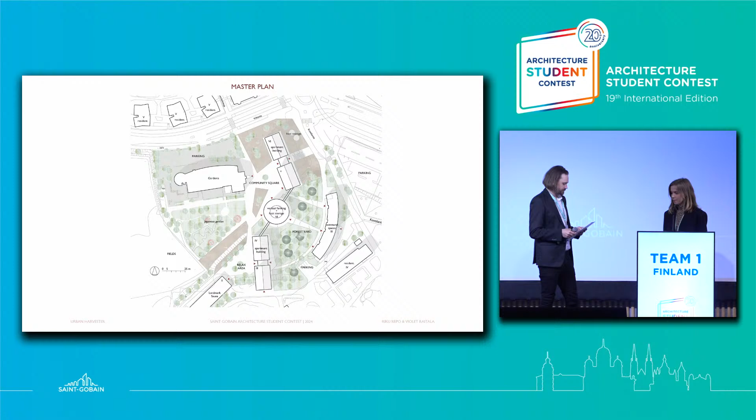The center of the site is a vertical farm building resembling a silo. In addition to giving residents an opportunity to harvest food, it functions as a seasonal thermal storage. With its positioning, it creates a center point to the surrounding buildings, and the connecting bridges provide easy connections and contribute to overall aesthetics.

Communal and commercial functions can be found throughout the area, making it easy to do everyday chores and to meet other people.

Now, let's continue with the renovation. The renovated building has been designed to meet the communal needs of the entire area. The building is divided into three functional zones for working, eating, and relaxing. The first and second floors are connected with a large opening which allows daylight to enter, and also enhances the interaction between the spaces. The building's exterior architecture has been preserved, maintaining its historical and aesthetic value.

Now let's move on to the new construction. The new construction combines elements from farm buildings and the high-tech architecture of Viikki. Red, different shades of grey, and glass appear traditionally in farm and cultivation buildings. Implementing these elements into the design, the complex makes a new distinguishable landmark for Viikki.

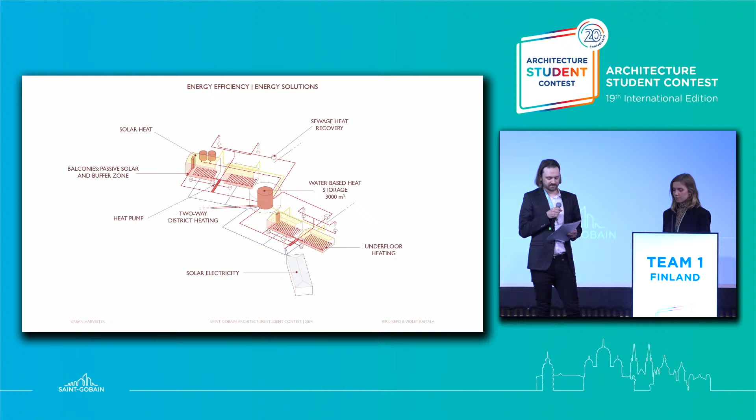Due to the cold climate of Finland, most of the energy in the buildings is used for heating. In Urban Harvester, the heat loss caused by high amount of glazing is compensated by utilizing active and passive solar energy. The energy is being harvested with a large amount of solar thermal collectors. The other energy solutions include a wide range of efficiency boosting technologies, and in the calculations, the building performed remarkably well.

Let's finish with the old museum. The museum is transformed into a commercial sauna. Due to the status of the museum building, the sauna is made with a space-within-a-space idea. The interior of the building is stripped to the frame and converted into a cold space. The exterior remains intact, and the building continues to stand as a landmark.

The whole project area aims to offer climate-wise living and self-sufficient solutions for everyone living and visiting the area. Together with long-lasting and carbon-wise building solutions, Urban Harvester strengthens the identity of Viikki as a creative, innovative, forward-looking part of the city. Thank you.

Photo. There's our certificate.

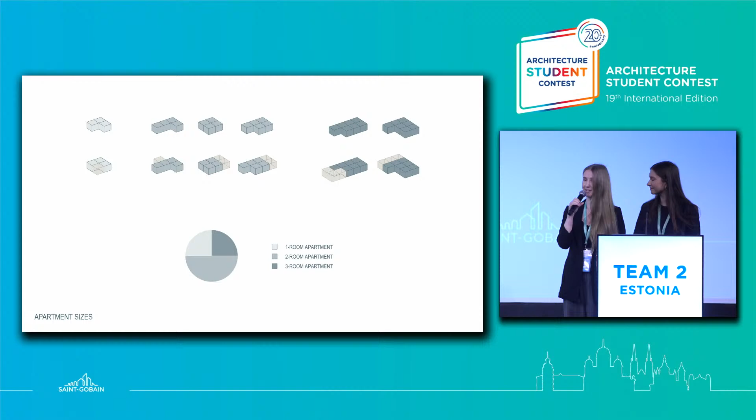We created a module system where one size fits all functions, allowing variability and simple structure. 13 square meters proved to be a carefully optimized module size. Connecting the modules creates different sized apartments. The main pedestrian street creates good connections and is a part of public space.

Commercial properties are located in the northern quarter to create a good connection between the campus and Gardenia. Commercial properties include restaurants, cafe, gym, and daycare.

In between, we integrated playgrounds and gathering areas. We wanted to create a diverse outdoor living environment, so throughout the plot there's a learning path, including the existing Japanese garden. The learning path ends with an open-air museum where nature-inspired exhibitions and workshops are held.

New buildings are divided into 2 types, A and B. Module quantity dictates the size of the apartments from small to extra large. Our system leaves a possibility for open or closed room composition. As the building rises, it steps back, allowing sunlight access and creating room for balconies.

Our building minimizes the use of concrete and instead, the main construction is made from local sawn timber. Roof construction carries the weight of the solar panels to maximize the use of renewable energy. All the exposed frames are made from glue-laminated timber, which is more durable to moisture. To extend its lifetime, all the horizontal areas are covered by steel plates.

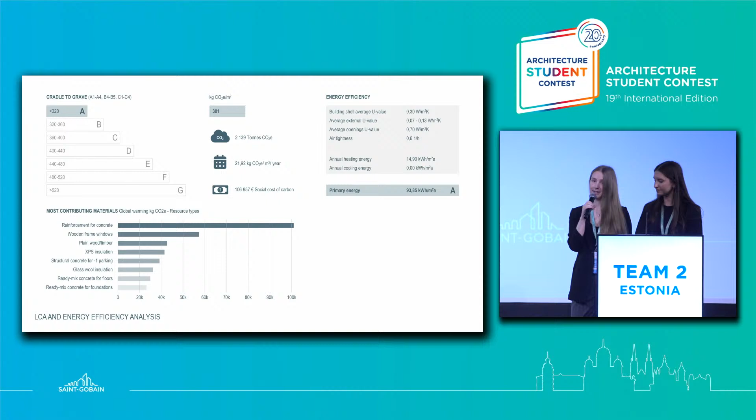The underground parking structure carries the weight of the building. We achieved the best results regarding the LCA and energy efficiency analysis. One building produces 301 kilograms of CO2 equivalent per square meter.

Our reconstructed building's original volume is long, narrow, and arched. Changing its function to dwellings, we wanted to avoid long, narrow hallways. Therefore, we added 3 new extensions, creating spacious, luminous stairwells.

Towards the inner quarter, we added balconies integrating the module system to create a cohesive design between the reconstructed and new. The reconstructed building includes a spa and sauna complex on the ground floor and apartments on the upper floors. A look throughout the spacious atrium in the building.

Our project creates a quality and cohesive environment for all age groups using sustainable approaches. Thank you.

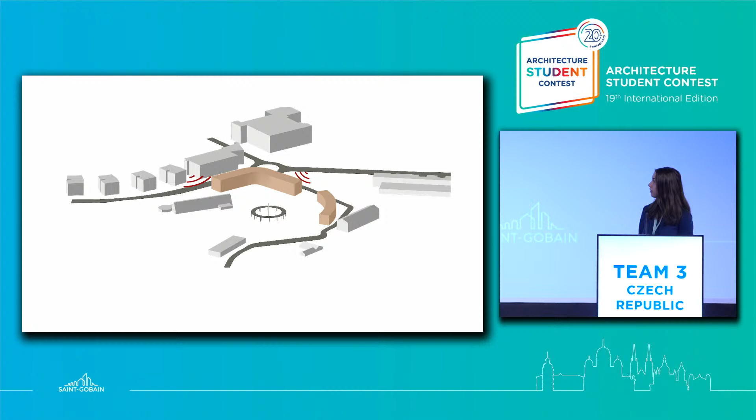The main building is built as a sound barrier between the main road and the public space. I used solar analysis where I found that between 11 a.m. and 6 p.m., the vertical element in the middle casts shadows on some parts of the buildings, and in these parts I created vertical glazed courts.

Based on the surroundings, I created a rectangular shape of the building. This building should be high enough to provide a nice view of its surroundings, so I created green roofs covered by steel shelters and roofs.

The first floor of the building is especially for commercial use and individual entrances. The rest of the floors have rooms for long-term accommodation for students and young families, with common spaces such as main corridors, laundry rooms, shared kitchens, and the last 3 floors have vegetated roofs.

As several buildings in that area are being demolished, I will use that construction rubble as an admixture to the concrete, which will be used in the underground floor and the first floor. The rest of the floors will be from CLT panels with a low carbon footprint, which can be easily prefabricated, and the rest of the building is with balconies and steel roofs.

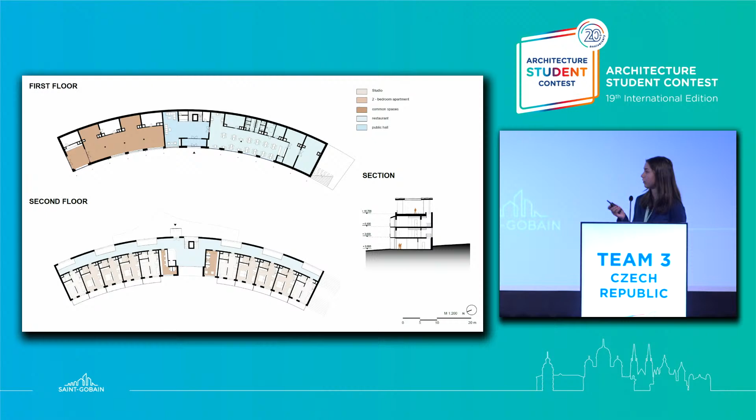The current office building has been changed into short-term accommodation for teachers and visitors of the university. As in the first building, the first floor is considered for commercial use, and the rest of the floors are mainly for rooms. The load-bearing structure of the building is from concrete or reinforced concrete, and the facade will consist of concrete panels on the first floor and white plaster in higher levels.

The energy and power concept of the building consists of controlled ventilation with use of solar energy, drawing energy from the ground by water heat pump, and the project uses a rainwater harvesting system. Both buildings have been assessed for daylighting and overheating, and dividing walls and ceilings were designed to meet specific thermal, acoustic and fire requirements by using appropriate Saint-Gobain materials and systems.

And finally, I would like to show you the transformation of the Big Museum. Thank you.

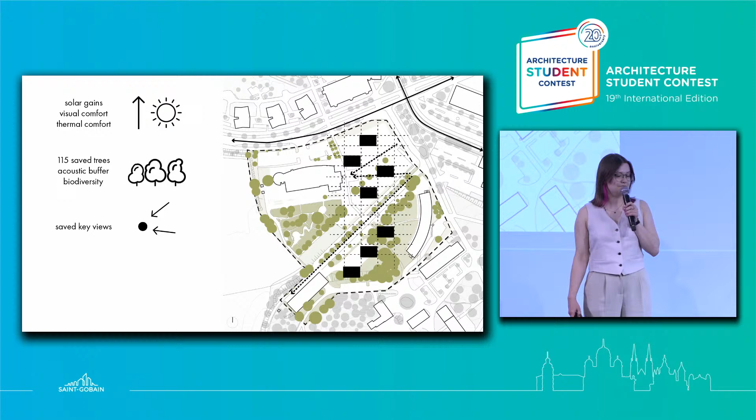The love and respect towards nature shapes the identity of the Finnish community. Our architecture is also open to the landscape. We designed a modular form that follows natural conditions, such as the sun path, existing greenery, and key views. We saved all 115 existing trees and added new ones.

The form enables maximized access to daylight, which is crucial in Finnish conditions. It also increases visual comfort, and trees provide an acoustic buffer while reducing carbon dioxide emissions.

The outdoor space is connected by the sport and recreational path, which leads us to the old museum. It was repurposed into a multifunctional court within the existing walls. The whole area is complemented by craft and local services managed by the residents.

Sauna is a space that integrates Finns. As you can see, you can turn anything into a sauna.

In the center, we've created an auditorium connected to the water zone and sauna. In summer, the water cools the area, and in winter, it can be used as an ice rink. Because, as the saying goes, there is no such thing as bad weather.

Only bad clothing. Our research proved how fast inhabitants' needs change and how fast architecture must respond to those changes. Following the open building approach, we designed a core house, which is a 2 or 3 bedroom module connected by

the core, a bioclimatic community greenhouse. We predicted possible adaptation scenarios: separated kitchen, additional workspace, or making the module more accessible. In the future, the building can readapt into co-living.

Building A underwent adaptive reuse, fully utilizing the existing circulation cores. We added vertical and horizontal extensions, making the building most efficient.

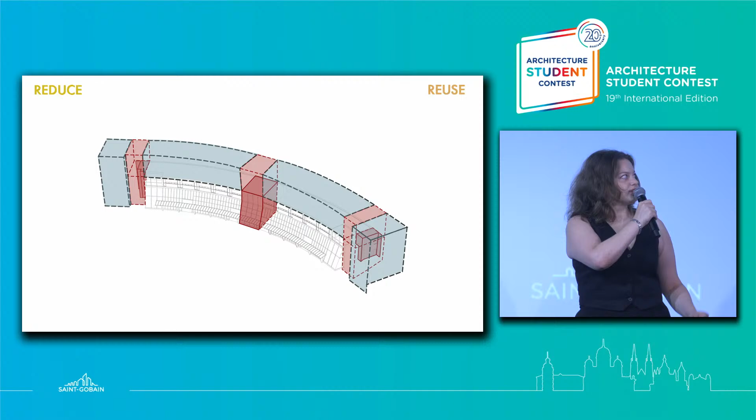On the ground floor, we proposed a Fab Lab to continue the university tissue. It's an innovative space where you can exchange knowledge by physical experience and integration.

Above, we proposed dwellings for researchers while maintaining the existing layout. In the site extension modules, we proposed integration areas, and above, co-living studio dwellings.

Wooden construction was always present throughout Finnish history. And look how easily it's built. That's why all the new structures are designed using prefabricated CLT construction,

locally sourced materials, along with recycled ones, significantly reduce the carbon footprint. Our habitat is a place where the old and the new coexist in harmony.

So now it's time for reduce. Both new and existing structures have well-insulated building envelopes. We doubled the external walls to create traditional casement windows.

Blinds allow for healthy sleeping conditions during the white nights. And noise is reduced thanks to false ceilings and floating floors. And it's time for reuse, which means the use of heat recovery and water recycle system.

Produce means using renewables, geothermal heat pump and photovoltaics. It all led to creating passive buildings. In the future, our building can integrate with the wider grid and redistribute the surplus of energy.

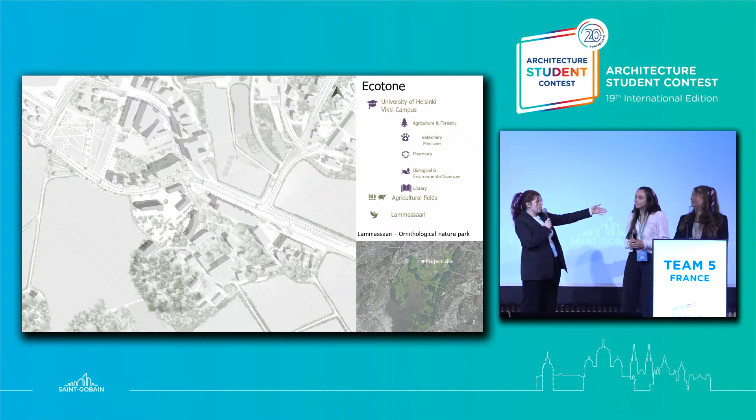This is what we sought to explore in our project proposal with a site that allows it in every way. It's the interaction between the university and the Lammassaari ornithological parks and the resulting exchange that form the basis of our research. Indeed, this urban setting is highly conducive to the creation of an ecotone, a transitional zone between two ecosystems where environmental conditions are distinct.

It's for this reason that we introduce a new main axis in our project, directly linking the university to Lammassaari, that we aim to dynamize throughout the journey whilst incorporating terrace spaces and a network of secondary paths. Then, a new botanical composition with a high layer for trees, a medium for shrubs, and a low for flowers.

It's with this framework that our building takes shape and will subsequently be green up to the rooftops, aiming to create interaction between the inhabitants of the district and the fauna while preserving a maximum of what's on site, the least possible disruption of the existing trees or the site's topography.

First, Building A, a multifunctional rehabilitation benefiting university researchers, with a cafeteria and library on the first floor, offices and laboratories on the second, and functionary housing on the top floor.

We've based our rehabilitation on 3 main principles. First, using the maximum of the existing structure while improving insulation. Then, maximizing external inputs by placing double-skin facades serving as winter gardens in the most exposed areas. And finally, placing in symmetry inhabited walkways.

The few parts we must deconstruct will be directly repurposed on-site or recycled, such as a portion of the main glass structure. The new walkway spaces offer an enhanced relationship between the interior and the exterior, improving the building's quality of life by shifting the circulation spaces. This allows us to connect humans, fauna, and flora within a unified architecture.

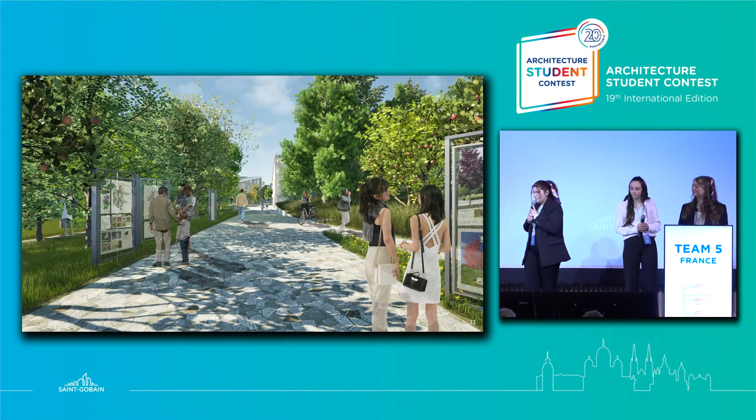Our new building is directly linked to the context, with building B1 facing the gardenia and buildings B2 and B3 placed at the level of the former L-shaped building, with ground level services and residential units on the higher floors.

We reinforced the concrete structure with metal, allowing us to envelop the existing with a new annexed wooden structure. The building follows the same double skin and walkway principle as Building A, adding walls with thermal inertia using raw earth bricks made on site through the excavation of exterior or underground amenities such as parking or sauna.

All of these construction principles allow us to have cross-ventilated accommodations with thoughtful preparation for spaces connecting the interior and exterior, and south-facing facades for optimal winter comfort. We've maximized the use of on-site natural resources such as geothermal, solar, rainwater, etc.

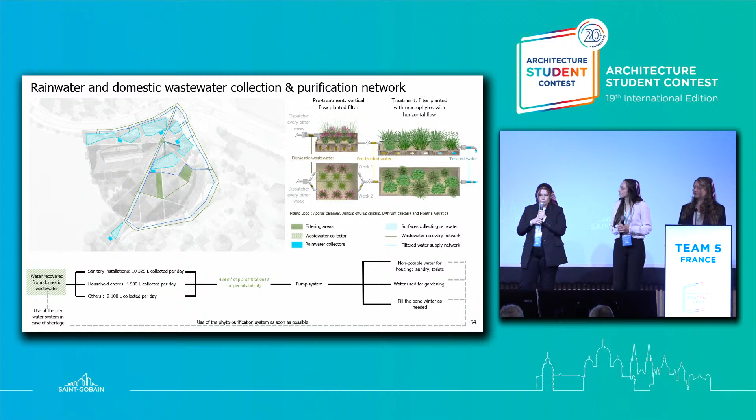This is a space that will evolve according to the seasons to offer various uses: a leisure space most of the time, an ice rink in winter, and a cooling space during heat waves. It is accompanied by scattered amenities throughout the site, such as a barbecue area or a children's park.

All of our project is interconnected through vegetation and knowledge, with explanatory panels on urbanism and biodiversity in Helsinki. This cultural journey community building C, the former museum, is partially deconstructed to accommodate an experimentation area for researchers and an exhibition space. All in all, this project allows for the creation of an ecotone for the healthy and sustainable cohabitation of the different spaces on the site, following the different seasons and daily light.

Following the different seasons and daily lights. Thank you for your attention.

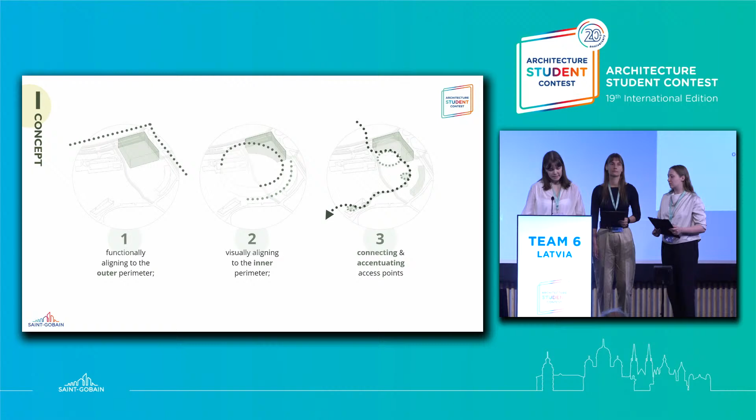Our vision respects the site's core, seamlessly blending in with the existing built and natural environment. We encourage walkability, creating pedestrian paths that connect the entire site while preserving a large percentage of the trees. We aim for a connected, yet, if necessary, privacy-providing environment.

We encourage an elevated pathway connecting the site, linking Zone B to the historic museum structure. The path is accessed from Zone B, as well as two points along the path by stairs and elevators for accessibility. We have completely eliminated the road that split the site, therefore unifying it, and created a pedestrian road which connects to the Viikki pedestrian and bicycle path.

We have designed various community spots throughout the site, including outdoor dining areas for social gatherings and an outdoor integrated bicycle storage. The solar analysis proves that the site is well lit throughout the year.

Building A fluently fits into the landscaped area. From building A, we take off the glazed bicycle shed and make the building a gallery-type building with two-sided apartments inside. In building A, we save the existing three floors.

On the first floor, we planned offices. On the two upper floors, there will be one to three bedroom apartments for short-term rental.

Mostly, we changed the northwest side. There is an outdoor gallery from which people can get into their apartments, and staircases which are designed like winter gardens. The bird-watching pathway is designed considering the curved shape of building A, and it reaches a height of up to two floors.

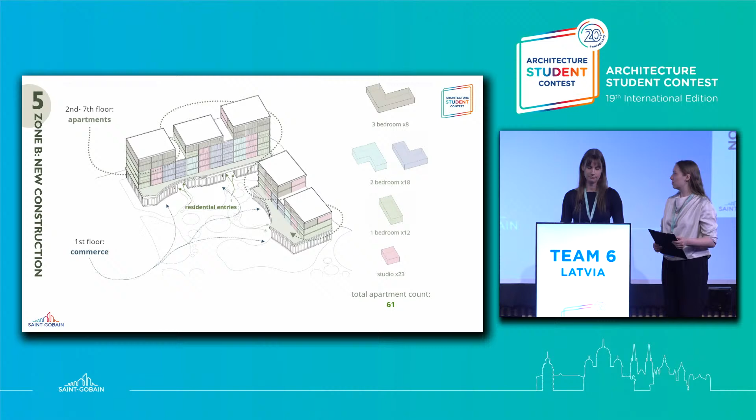In building B, we created dynamic silhouettes so it fits into the existing environment and makes a proportional distribution of apartments in the building.

On the underground, we planned parking lots and storages. On the first floor, there will be some commercial areas, while on the upper floors there are four different types of apartments. Half of the apartments are provided with private balconies, which highlight the facades.

The first floor is higher than others, and on that there's a planned green roof terrace. The old museum will be preserved as the basis for raised bird-watching platforms. The idea of the Japanese garden will be continued in the renovated area, creating an organic network of walkways.

For the project's technical solutions, we use Saint-Gobain's guide for design of facility buildings to lower carbon emissions and shorten construction time. This provides needed construction U-values and other building physics.

Multi-comfort house creates living space that provides comfort in various aspects. Acoustic comfort is ensured by using proper construction materials and the natural sound absorption of existing and new trees.

To improve daylight comfort, living rooms and children's rooms are mostly located on the southeast side, but bedrooms are on the northwest side. To ensure thermal comfort, living rooms are heated with radiators, but bathrooms and kitchens have heated floors.

To create an efficient ventilation system, a mechanical recuperator provides heat exchange combined with natural ventilation. A rainwater collection system gathers water from the roof and is used again for watering plants and toilet water.

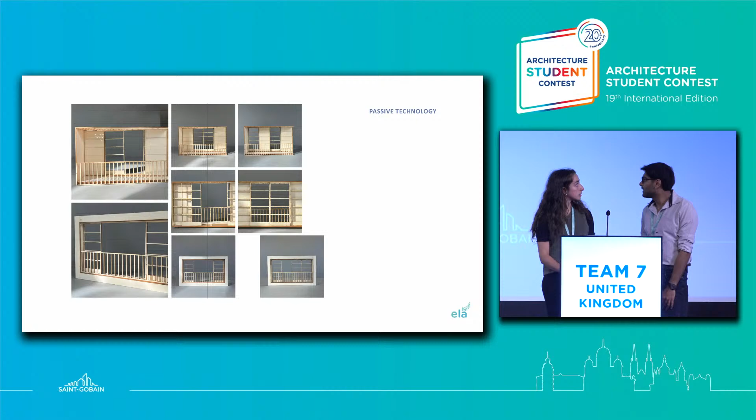Here we have our passive technology system which we've introduced to our building, and most significantly we've introduced a series of sliding screens. When these sliding screens are shut, they achieve a thermal barrier and a U value of 0.7. When they're open, they allow optimal daylight to enter the building, and the beauty of this system is the users can easily change it and have autonomy over their space.

For the materials, we wanted a tight envelope to ensure occupancy and comfort, so we implemented a thick insulation layer which wraps around the whole building, with an additional layer on the green roof and solar panels, with the interior walls and floors having noise reduction.

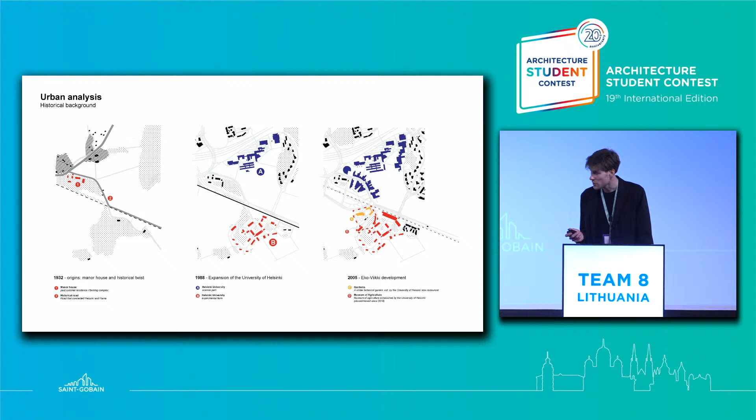So that context became the basis for the urban concept, which in essence is about connecting these two sides of the campus and its built heritage by creating a new link, a network of pedestrian pathways and public spaces of different character, and blending that with natural elements.

The brief was to transform this building into temporary housing for researchers, as well as to have some research facilities. So the idea was fairly simple for us. We wanted bigger housing units, so we decided to move the circulation path by creating a gallery structure on the northern side and propose a loggia structure on the southern side, which would serve as a sheltered outdoor space.

To accommodate additional programmatic requirements, we decided to do an extension, and that's where the research facilities are — it's an autonomous part of the building.

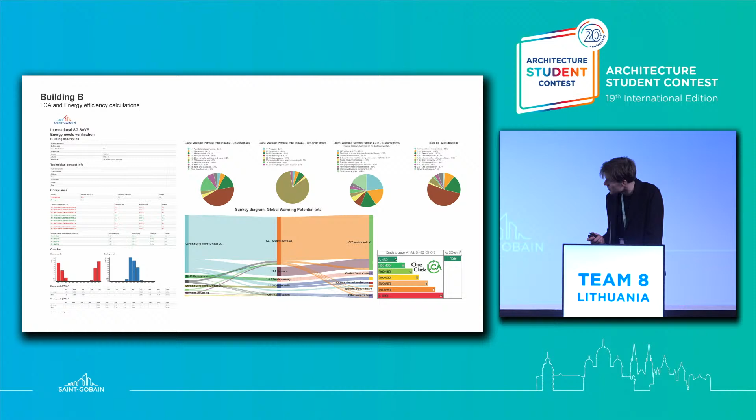Area C is currently empty, and the existing agriculture museum is not used, with its collection moved to another building. So the idea is to turn this area into a vibrant community space that could progressively change according to community needs, and hopefully serve as a catalyst for further development and the eventual reconstruction of the existing museum building.

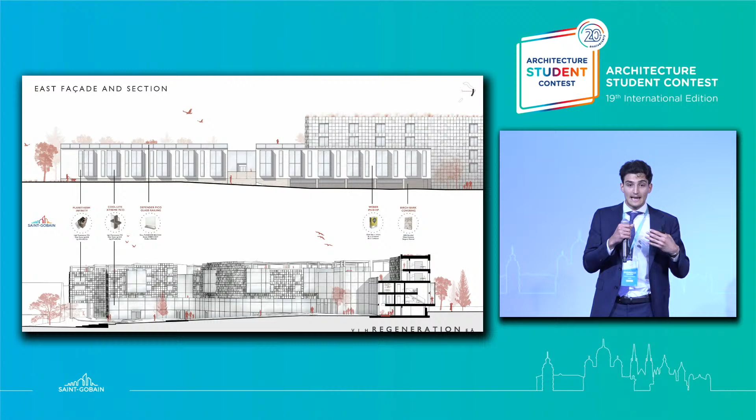Starting with the renovation project, we focused on saving as much as possible. By maintaining the concrete structure, we avoid producing additional carbon emissions, so we redesigned the internal walls and main facades. The ground floor features a kindergarten and private saunas for the residents, while the upper floors have 12 duplex apartments. As we can see from the facades, glass is the main character of the composition, as it brings natural light into the building.

The public spaces are indicated both in section by the double heights and in the facades by the curtain wall that contrast with the opaque upper portion of the envelope. The facade is characterized by a photovoltaic coating, but we will analyze it later in the energetical insights.

From the lighting analysis we conducted, we showed the benefit of having a double exposure. As a matter of fact, the greenhouse serves as a secondary lighting source that improves illumination uniformity in each room.

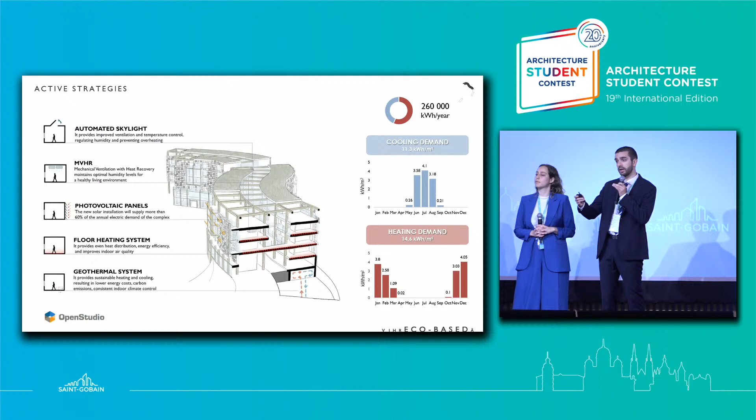Let's move on to the energetical analysis. We identified 5 passive strategies that promote the energy efficiency of the building, such as a green roof system or a Pareto dynamic facade. As active strategies, we have a photovoltaic coating and a geothermal system that will cover the heating and cooling demand of the building.

Going into the envelope details, its elements are entirely prefabricated and feature wood as both load-bearing and insulating material, as a matter of fact the external ETICS is made of cork panels. The structure is composed by a frame of glulam columns and beams with an external timber frame shell and cross-laminated timber slabs. We decided to use this type of solution thanks to the benefits given by this biogenic material.

The Pareto dynamic wall is able to take advantage of the gap in the ventilated facade to regulate the temperature both in winter and summer.

The photovoltaic facade will supply more than 60% of the annual electric demand of the building. In the end, the LCA shows that we are in a Class A of Carbon Heroes benchmark and getting close to carbon neutrality thanks to the balance of footprint and handprint.

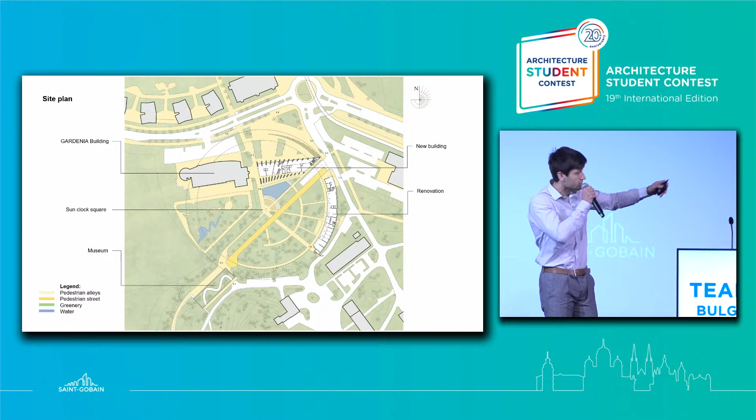Here you can see how it looks like. On the axonometry are visible all the elements of the context. The street crossing the complex is converted into a pedestrian street with restricted vehicle access, which unifies the space, making it more pleasant for a rest, and able to be a transition between city and nature.

The new building is at the northern part of the complex. Its south facade is open, facing the nature reserve. Its north facade is glazed, forming big public space in front of it and connecting to the existing building of Gardenia by using the same exterior materials.

The new building consists of 5 residential floors and a commercial ground floor connected to an underground parking. The residential part has 3 types of apartments with 2 bedrooms and single-space studios.

The shape and the exact angle of inclination of the building are a design result of the sun path in Helsinki, which means that every apartment has optimal daylight and even more - own terrace with own garden and a south view towards the nature park. The common spaces look to the city and the square in front of the building.

One of the sustainable strategies of the building is the zoning of heated and unheated spaces. The heated volume is much smaller and the unheated one serves as an additional insulating space.

The floor slab made of CLT panels and the installation detail of the windows prevent thermal bridges. The combination with Saint-Gobain materials complies with the requirements for acoustic, thermal comfort and air tightness.

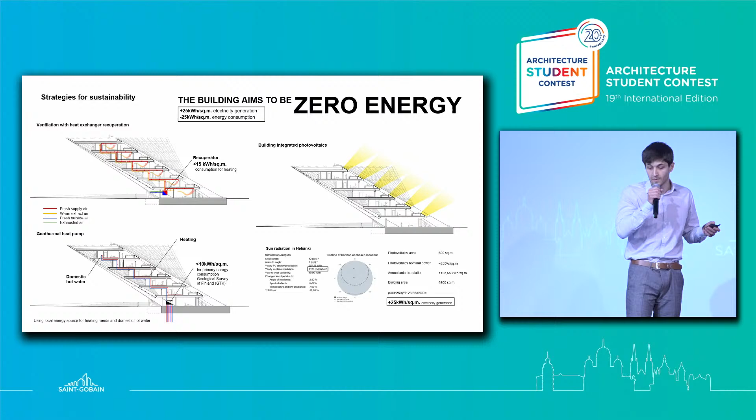The south facade has building integrated photovoltaics, which contributes to the architectural presence, and combined with the geothermal heat pump and the passive ventilation, make the building zero energy.

The construction of the building is made of prefabricated glulam elements forming a fixed connection between each other. This enhances structural efficiency and has advantages such as precision, speed of building process, and lower cost.

On the structural prototype, you can observe the structure of timber frames, the joints between the elements, and one of my favorite things, the stair. The building complies with the requirements for energy efficiency and lighting autonomy, and has Class A for life cycle impact.

The renovation of the existing office building is part of the Unity concept and respects what already exists. The annex follows the continuation of the existing volume, keeps the facade rhythm, and increases the height and verticality so that they flow into the new building.

The dismantling operations are minimal and mainly interior, in order to preserve the facade and adapt the function. The renovated building has 4 residential floors and a public ground floor provided for students and visiting researchers. The residential part has 32 studios of 45 square meters with their own accessible bathroom and kitchen. The meeting rooms have adaptive distribution, natural daylight, a view to the garden, and sound-absorbing walls.

The material usage provides acoustic and thermal comfort. The building has passive ventilation, a rainwater usage system, a geothermal heat pump, and Class A for life cycle impact.

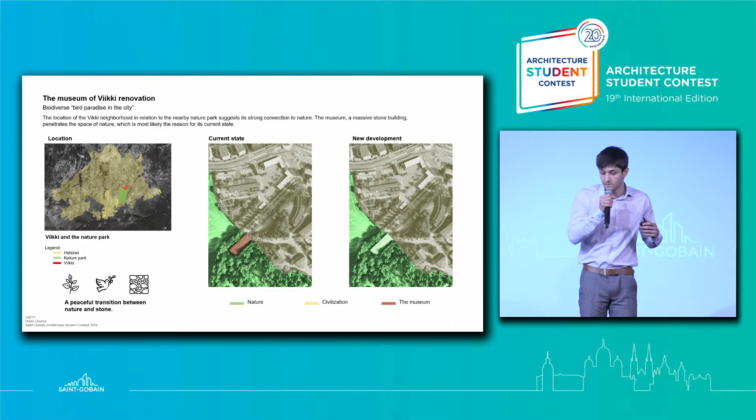Part of the green zone of the project is the Museum of Viikki, which has a very strong relationship with nature due to its location. The concept for its renovation is to convert it into a transition between city and nature, a place with room for all. This way, the museum becomes part of the bird paradise in the center of the city, stimulating biodiversity, while preserving its function as a museum for live, free, migrating birds.

Thank you for your attention.

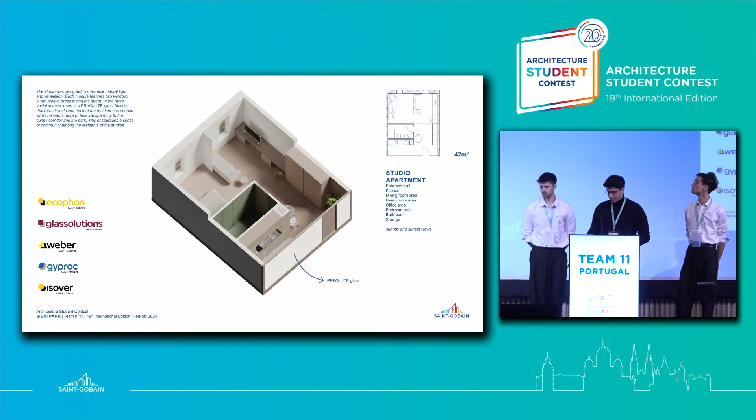PRIVA-LITE glass walls offer residents flexibility to choose between privacy or openness to the corridor. The use of green walls, an extensive green roof, and solar panels on the CLT facade that move to shade the corridor further enhance the building's sustainability and functionality.

With the position of the new building, we created a filter between the city and the park. Through the use of mushroom shapes in the facade, we ensure the connection between green and urban environments. Here, the Sieni are reimagined as pillars that support the building's simple, easy-to-assemble CLT structure.

The building is composed of 5 blocks with 3 apartments and a private sauna per floor. Shared amenities like a yoga studio and a gym are located on the first 2 floors, and on the roof there are 2 patios accessible to all residents offering wonderful views over Helsinki.

Even with different typologies, all the apartments follow the same design principles. Each has a generous balcony with a glass enclosure, ensuring it's used even during Finland's harshest winters. As a general rule, the apartments have both eastern and western facades in order to assure cross-ventilation and better natural light.

For greater flexibility and future-proofing, the walls between dwellings align with the building structure, and in 3-bedroom apartments, layouts can be changed through the use of retractable walls, making it easy to accommodate different lifestyles.

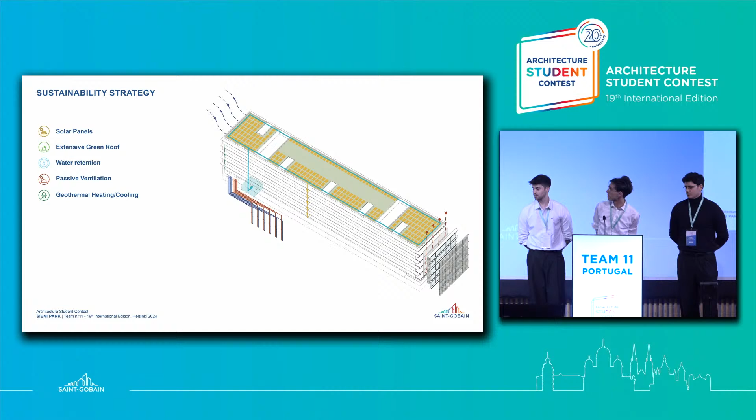Furthermore, we have a comprehensive sustainability strategy. We use solar panels on the roof that give more energy than the building consumes, so the surplus is given to the city. Between the solar panels, there's an extensive green roof that retains water for residents to use. A passive ventilation and heating system eliminates the need for polluting solutions, and the geothermal energy system, coupled with underfloor heating, warms the building naturally. All these systems work in harmony to create an eco-friendly and self-sustaining building that complements our holistic approach to design.

Sieni Park sets an inspiring model for sustainable urban development in Finland and showcases architecture's crucial role in building a greener and more resilient future through a human-centered approach. Thank you.

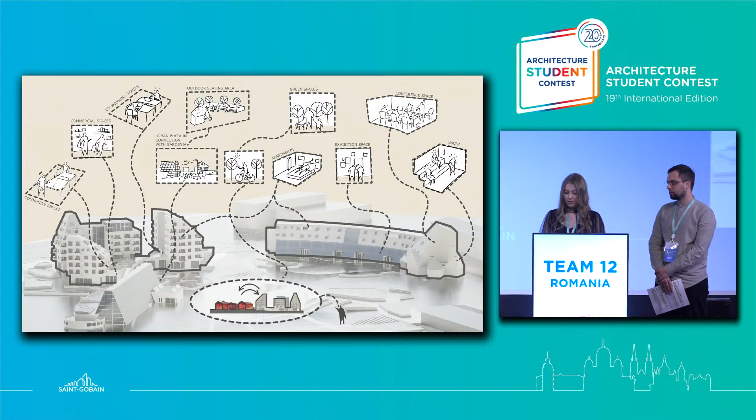The upper floors are dedicated to apartments, offering privacy and comfort to residents. Our building combines natural light, solar panels, sustainable wastewater management, and high-performance systems to enhance comfort and energy efficiency.

To ensure visual comfort, we prefer natural lighting and energy-efficient LED lighting. Acoustic comfort is achieved through strategic building planning and advanced acoustic installations, such as Isover Acoustic and Weber Comfort Light. Thermal comfort is improved through an underfloor heating system, geothermal heating pumps, and photovoltaic panels. We have integrated mechanical ventilation systems to maintain superior air quality. Green spaces act as noise and pollution barriers while offering pleasant views.

We used a range of Saint-Gobain products, such as fire resistance plasterboard from Gyproc to ensure long fire resistance, Isover Premium 33, and Saint-Gobain Cool-Lite Xtreme for thermal performance requirements.

Our building prioritizes circularity and sustainability by using low-impact materials such as cross-laminated timber, which is renewable and has a low carbon footprint. We also used local materials to reduce transport emissions and support local economies. The demolition materials were reused, with aggregates repurposed for new basement concrete, minimizing waste and reducing further environmental impact.

The rehabilitation of the building in Zone A started from the careful conservation of pre-existing elements with a contemporary approach to integrate the building into the urban context.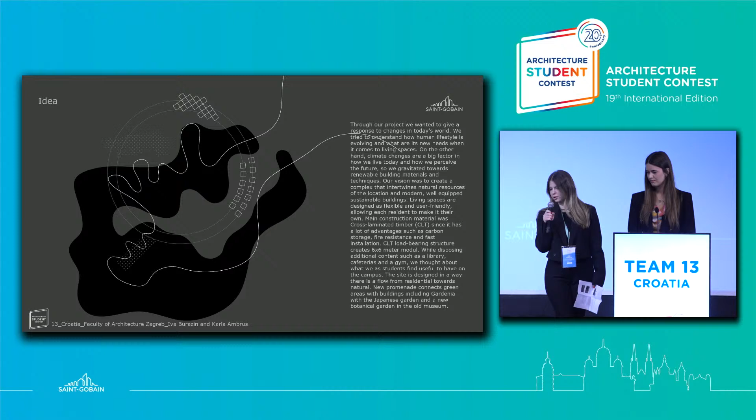First is the building in Zone A. We transformed the old building into a modern residential building with commercial and other functions on the ground floor. We used the load-bearing structure from the old building and improved it with CLT extensions. Here you can see a dynamic envelope that corresponds to our new building in Zone B. Apartments are bright and comfortable, while the site is designed as public with lots of greenery.

This leads us to Building B. Here we designed a 5-story building with underground parking and public and commercial spaces on the ground floor. As seen on the screen, our building geometry is marked by terraces, allowing each floor access to an outdoor space.

Each of our apartments is made of multiple CLT structural units, with the possibility of adding more of them in the future. Our living spaces are flexible and user-friendly, so every resident can make it their own.

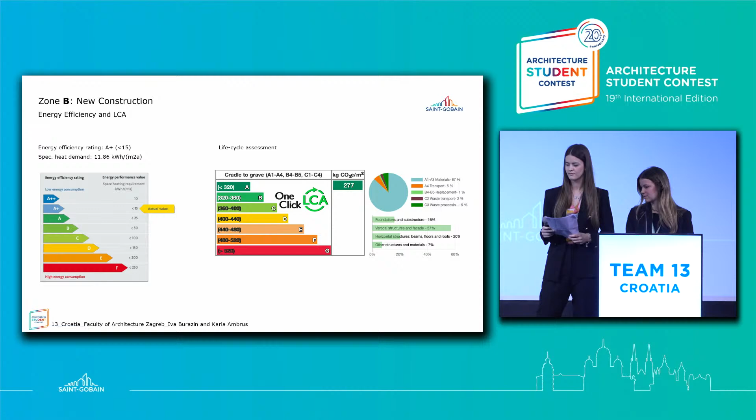Finally, there is Zone C. Here we preserve the museum stone walls and design a botanical garden. It features Mediterranean, evergreen, domestic, orchid, and exotic gardens, and it serves as a meeting point along the new promenade.

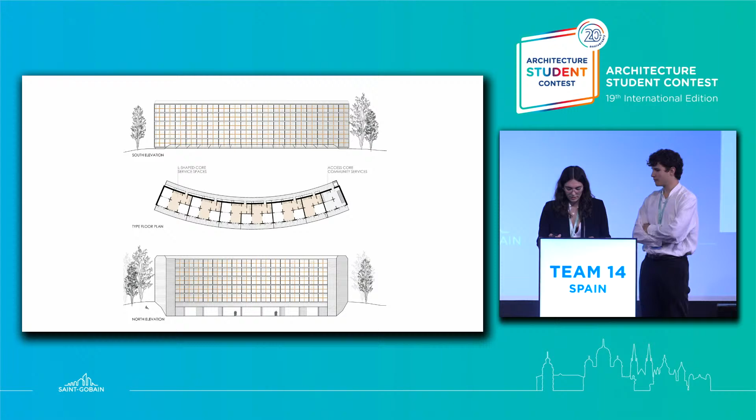These rooms are formed by a core where all the common spaces are located, extended with one, two, or three private rooms, such as bedrooms or offices. The cross structure of CLT defines the space, leaving large openings that allow light to enter through the building. All the space is connected by sliding doors, giving freedom to distribute activities to suit the residents.

The south-north extensions are common areas during the day, and at night they are closed off to become bedrooms. Alongside the common areas are communal spaces such as laundry, a meeting point, or a co-working space.

The building is a thermally isolated CLT box, which opens to the south to let in as much light as possible and closes hermetically to all other directions. The south facade grows with a glazed gallery, creating a bright space with excellent views for the residents. This architectural feature will also serve to minimize heating needs in autumn and spring months.

On the north side, there are access corridors to the flats, giving a double skin that protects the building from the cold wind. The arrangement of cupboards will produce a storage space and thermal cushion at the same time, where the resident can leave all their outdoor clothes, keeping the snow outside of the interior.

On the roof, there is a thick layer of vegetation, giving a high level of insulation increased in winter by the snow. In the lower part, there is an underground commercial area.

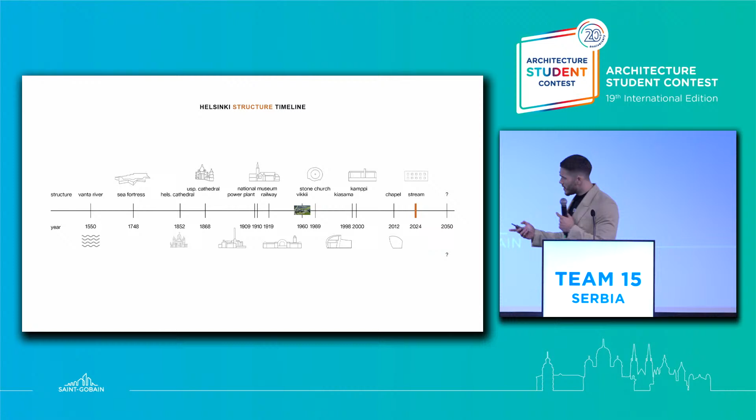First, let's talk about history. We have 2 parallel timelines. One is about citizen population, from which we can assume future city capacity. The other one is about structures, from which we can conclude the main identity motives, and those are monolith structures and human-scale architecture. In Vikki, we had a few different structures, so we decided to preserve as much identity as possible, but put everything under the same roof.

Of course, nothing was accidental. There was a lot of proportional tests, so the final result is a semi-public area that goes throughout public and private units and makes everything blend together. With a few simple steps - demolishing the L object on the corner, nature addition, and uniting structures - the final form is then physically tested, so statically we had no problem. Planning was, of course, subordinated by the users and their movement, so that's why everything is so easy, accessible, and easy to use. And what's most important, it can be built throughout phases.

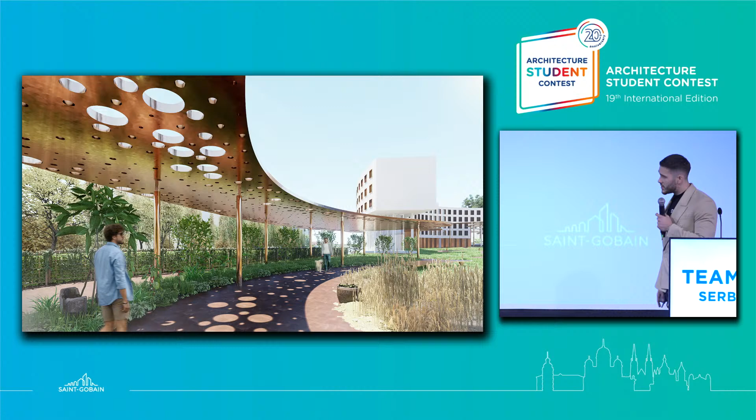What about the old museum? We revitalize it and put an easy removable market for the products from urban farming in the park, so now we can implement the Finnish famous oats, barley, rye, and wheat.

This dominant copperish structure is much more than a sun shading system. It's actually also a water collecting system that drains the water throughout the columns all the way down to the garage, where it's collected and purified. Then that water is later used for plant irrigation, for heat pumps, and for sanitary water, of course.

The complex has its own bar, library, and kindergarten, where we can see the children from our own home. Of course, there's a restaurant and a gym, but what's most fascinating about the complex is its construction, made from recycled concrete, terrazzo, and CLT, cross-laminated timber.

First, because the demolished object was partly made of CLT, and the other reason is that Finland is the most forested country in Europe. So the program has 1-room apartments, 2-room apartments, 3-room apartments, and of course some resting and working area on each and every floor, with living and sleeping areas, kitchen and bathroom.

Of course, every apartment has storage, because Scandinavian style is not the same if you put the vacuum cleaner in front of our TV, right?

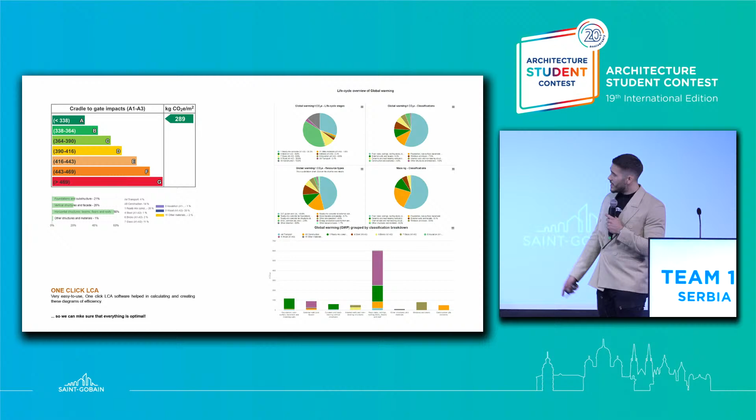If we talk about sustainability and technical systems, we have vertical ventilation channels, recuperation of air, solar panels, and much more Saint-Gobain products that helped us achieve the A class in LCA testing. Using these products, we achieved that, and I was frankly very amazed with the Saint-Gobain products. So at the end of the day, we can feel, see, hear, and live better. My name is Luca, and this is the stream.

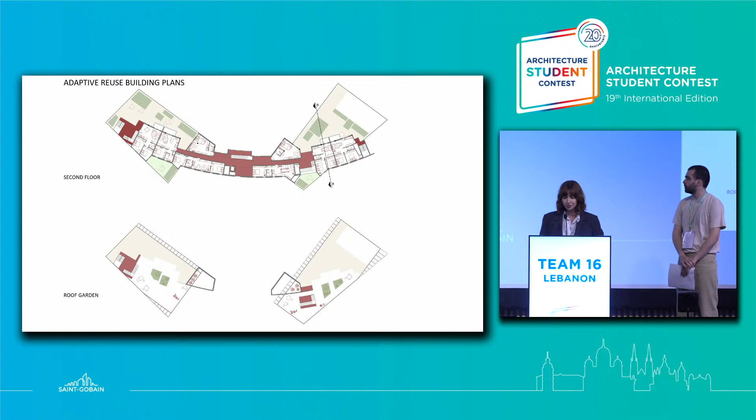Moving on to the new housing units, the volumes were purposely more slanted towards the south, allowing more sun exposure. However, the openings were limited on the northern facades. Every greenhouse has a particular form, so each apartment is one of a kind.

The glass courtyards are separated, yet strongly linked, functionally through the underground and the landscaping, and visually through the continuous disposition of the greenery throughout the units, creating an uninterrupted flow of space and circulation. A courtyard was implemented in the parking, functioning as a central access to it and making the space less repelling.

Forms create multiple levels of gardens. A common courtyard on the ground floor, we start discovering private gardens and terraces as we go up. Access to apartments varies, so does the relationship between them.

Harvesting spreads through the units, so consumption and production coexist. Each apartment is crafted into a specific atmosphere, exploiting spaces into full potential. All units have direct contact with the courtyards and the outdoors. The common spaces, circulation layout, and the overall logic of the greenhouse enhances bonds and social interactions among residents.

Moving on to the cultural spaces, a birdwatch tower stands on the limit of the Japanese garden overlooking the neighboring reserve. After removing the roof, the museum that once was the host becomes the subject of admiration through placing a light structure library within its walls.

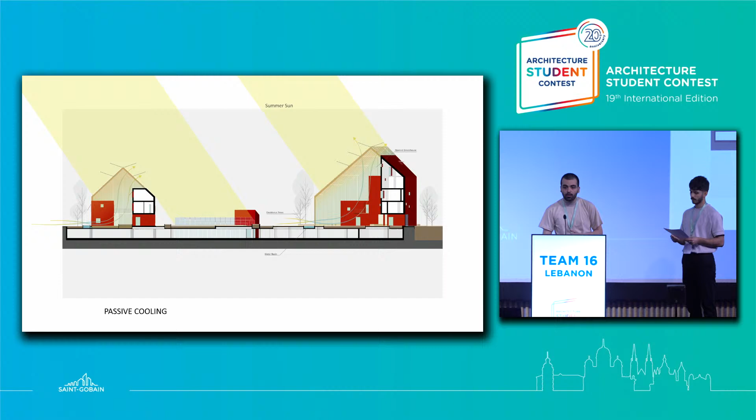Alongside the greenhouses, a resistive heat generator and a geothermal system were installed to help the units withstand the harsh climate condition. To eliminate traffic noise, a green buffer zone sits on the limit of the site. The construction is entirely wooden, except for the concrete foundation and the glass skin.

Most of the materials are locally resourced, ecologically produced, with a low carbon footprint, rendering the LCA of the project to 193, a Class A sustainable, eco-friendly building. The details of the carbon footprint of such construction method is 65% lower than common concrete construction. The details of the building are covered in our study, all while using Saint-Gobain materials.

This project envisions a model that not only hosts environmental and financial benefits, but also fosters a genuine sense of community. It aims to reconnect people with nature and shift the model from consumption-centric to production-oriented. It strives for sustainability on the long run and serves as a blueprint for future construction projects. Thank you.

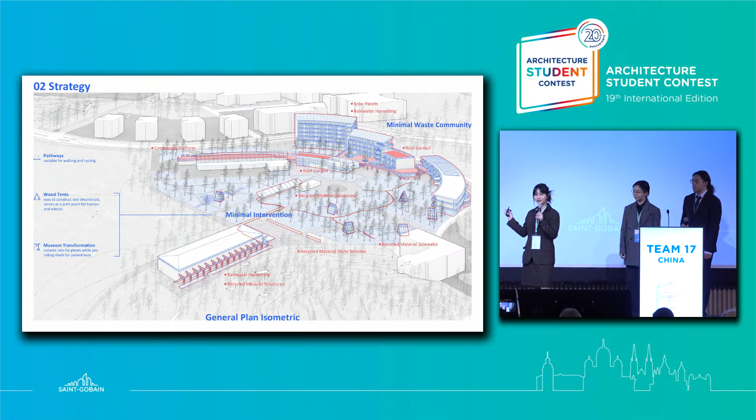The new building rises from existing curves. Horizontally, it links up the existing buildings, and vertically, it provides a transition from urban to nature. Two strategies were applied on site with different focuses: minimal waste for this part and minimal intervention for the more natural areas. So what exactly is minimal waste?

Let's dig into this strategy. First up, Building A gets a makeover, not a teardown. We're saving all the structures while updating the functions to meet the needs of the visiting researchers. As you can see in the plans, everything in red was kept, while everything in blue could be easily recycled afterwards. However, Building B is a different story. It needs to be rebuilt.

But we are not tossing everything. While deconstructing, we're sorting materials into reuse and remanufacture. Formal ones like wood, windows, and claddings are directly reused on site, while steel, gypsum, and concrete are made into something like paving stones or interior walls. By this means of urban mining, we're turning something old into something new and valuable. Still in the plans, everything in red was directly reclaimed, and everything in blue could be easily recycled afterwards.

Just check out the elevation. Those windows and claddings, yes, they're directly reclaimed on site and shining in their second act of life.

We don't stop at materials. Our strategy for insulation and energy use is smart, so that we can cut costs and carbon. The strategy also varies differently according to the seasons. Moreover, with the help of the BIM system, we are able to build a digital twin of our building, so that we can monitor and adjust the entire building's energy use just with our mobile phone.

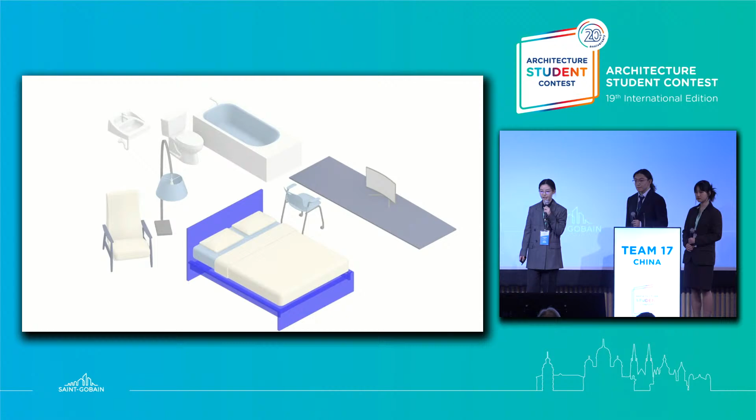When it's time for the building to come down again, thanks to the BIM system, we are ready to sort all the materials and reuse them all over again. This could keep our commitment to sustainability strong from start to finish. With all what was mentioned, we are able to create an atmosphere that respects the past, embraces the present, and supports a sustainable future. Whether you're cooling off in summer or cozying up in winter, our building could be enjoyed all year long. So, what about the natural areas?

Well, let's switch to our second strategy, the minimal intervention on the landscape.

This strategy helps us to preserve the nature as well as the site's history, which is mainly about the stone wall. We use architecture leftovers to build a new pavilion alongside the wall. It not only enhances the view, but also can support the old structure.

It looks like this. And also with architecture leftovers, we build several wood tents to encourage people to dive into nature with full respect to local wildlife. You can see the tent opens at the top for birds, and it is lifted up for land creatures. So in short, our minimal intervention is diverse, bio-friendly, and sustainable.

With all the methods mentioned above, we made the Viikki community a laboratory. We see all buildings like material banks, and with our method of reuse, recycle, and remanufacture, and with the help of BIM technology, we can make these material banks even smarter and more precise. And of course, the LCA calculation of our solution is much better than the baseline, even reaching the first class.

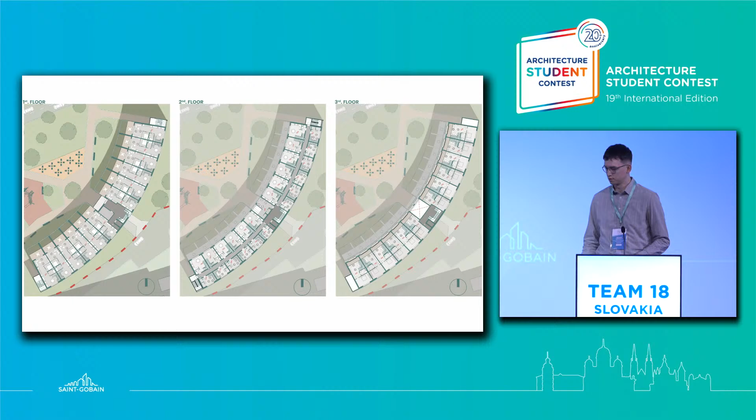Inside the building, there are only two types of apartments. On lower floors are apartments with front gardens, and on the upper floors are apartments with loggias. Both types of apartments are two-story apartments, which greatly improves the economics of the building because there's only one horizontal communication on the second floor.

So the building features a residential green roof and attractive public spaces in front of it, for example, a kids' playground and workout area.

And now we are moving to the museum building, which was recreated into a multifunctional cultural space. The new structure was built inside the existing building, preserving its exterior walls. The new structure has glazed facades, so visitors can enjoy their event while feeling the old spirit of the stone structure. And this is how it looks.

Thank you for your attention.

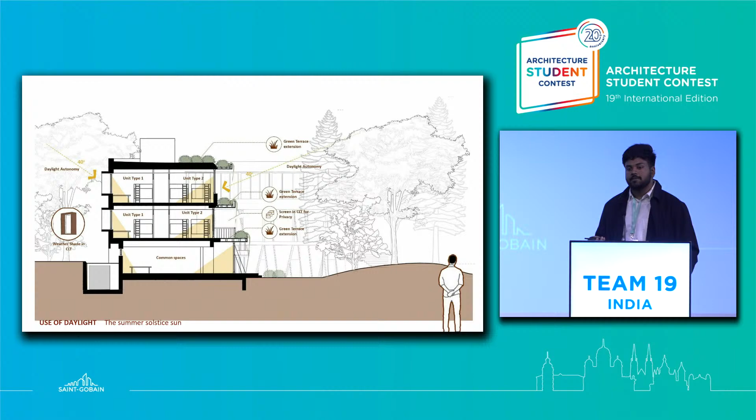At the same time, making it overlook spaces to the outdoors and creating that kind of interaction, be it physical, mental, emotional, was about sensitizing one to the surroundings, given this rich context. Just an overview of how the site sits and how the building works.

Quickly moving on, an extension of Site A becomes Site C, the museum. I looked at it as an extension to building A, wherein this becomes the cultural core of this whole site, intended to be that point of interaction for different events, cultural congregations, and students, so a lot of parties.

The museum then becomes that aspect of memory and a backdrop that serves like an outdoor art gallery, which surrounds a trail and takes you towards the woods as well. So it's like you create paths with the context and what you have on the context, thus connecting and activating different aspects.

Next, moving on to the building that is the new construction, that is Site B. The idea here was to use around 30% of the construction of the site, so that I keep the building as compact as possible to achieve efficiency in it.

The planning happens such that green open spaces drive the lower floors, and the modules that are created have the uppers overlooking these green open spaces.

The lower floors become the common areas which have a lot of functions like supermarts, sauna, common recreational spaces, lounge areas where people could always meet and greet, given the weather here, so not always can you go outside. So that's kind of a porosity maintained at the lower levels.

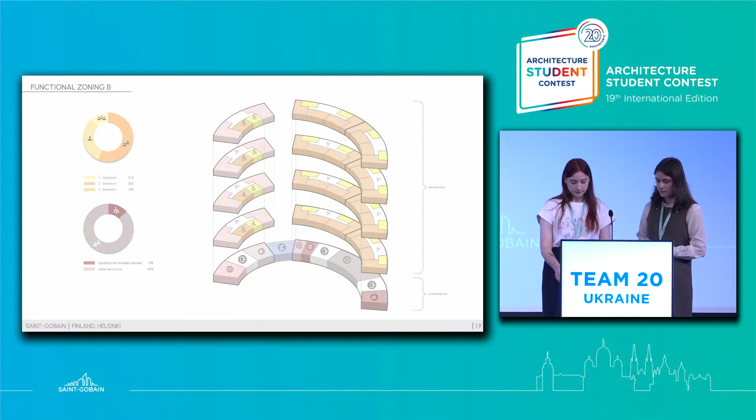Building B has 64 apartments, of which 31% are one-room apartments, 56% are two-room apartments, and 13% are three-room apartments, with 13% for low mobility groups. Each apartment was designed in accordance with design specification with the necessary set of rooms.

Natural ventilation is achieved by maximizing the area of windows. Optimal air exchange is maintained by a CO2 controller. Partitions have additional sound insulation.

85% of living spaces receive at least 3.5 hours of insolation. The slide shows all the necessary components to achieve the technical conditions, namely soundproofing, balcony waterproofing, the absence of thermal bridges, and thermal insulation. The main elements of the facade are wooden vertical elements and polygonal prefabricated fiber cement modules.

The life cycle assessment reaches level A. The main part of carbon emissions is influenced by the building material component. To increase the building's autonomy, solar panels were added.

The energy generated is used by both the buildings and the parking. The energy efficiency rating reaches level A. During the calculations, Finnish regulations were taken into account.

We managed to develop a comprehensive solution to improve the quality of the existing environment and expand the functional areas within the site. The project provides residents of the complex with all the necessary infrastructure for a high standard of living and the creation of a unified community. Thank you so much for your attention.

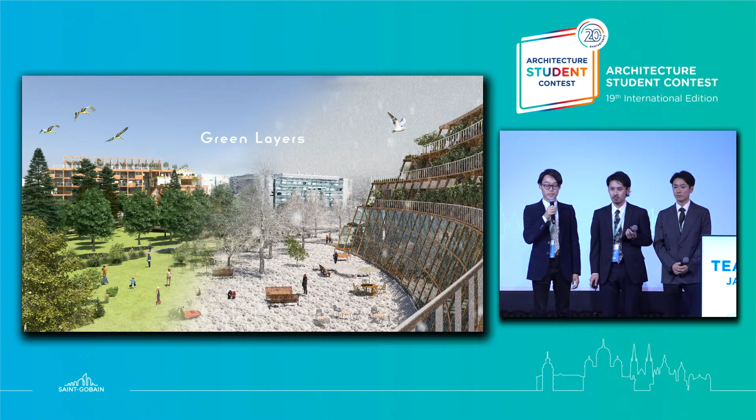Our first step was to analyze the environment. Helsinki has little sunlight, so the layout plan and volumes need to be carefully considered. The wind is blowing from south or southwest in line with incoming sunlight.

The site is surrounded by diverse facilities, hosting a wide range of people from students to professors who will need various spaces such as meeting spaces. Based on these analyses, we propose a concept, green layers, where we keep the greenery as much as possible while creating spaces for human activities.

Green planning, green zoning, including existing trees, creates spaces for humans and nature to coexist. Now let's look at the specific plans for each zone.

First, building A. While making maximum use of the existing concrete frame, the living environment will be improved by adding an extension on the outside with timber. We propose a large atrium connected to the outside.

The composition of the dwelling unit is quite simple, and the room layout is designed to connect the greenery from inside to the outside. The rooms are loosely separated from each other. By adding an extension, we created a coexistence with greenery and provide large terraces for inhabitants.

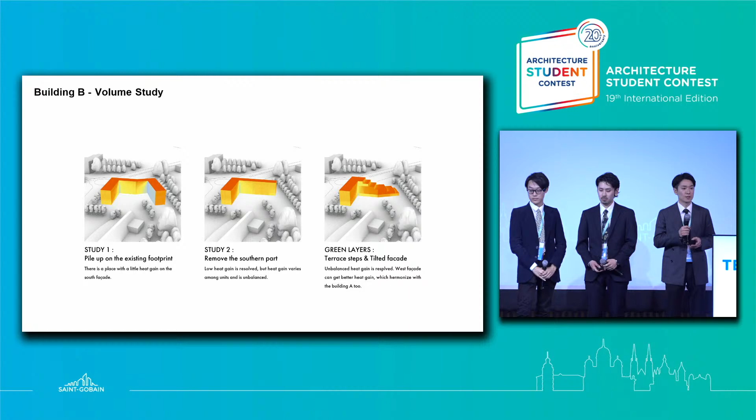Right, let's move on to the new building. From the existing foundation, we eliminate the area which is in the shadow cast by the building in Zone A, and allow light to reach each dwelling unit equally.

This allows us to reuse many foundations and reduce carbon emission. The ground floor is open to the public, including a sauna and library. The entrances and exits are carefully shielded, but plenty of sunlight shines into the various rooms.

The gaps between dwelling units are shared spaces for residents, which is a way to be alone away from their home and then to walk with greener views.

On a stepped volume, this is a garden accessible to the residents, which is an outdoor opportunity for them for relaxation and interaction. The trees around the building will control the heat.

Each unit has a sunroom, which will be a buffer zone of traversed greenery or space. So you can enjoy multiple layers of greenery from a wooden space like this with no obstruction.

This is because the sunroom and CLT wall structure ensure the large frontage and sufficient daylight autonomy and sun heat.

The rooftop will house a garden, which is the test farm of the university, and enriches the agricultural research of Viikki campus. Air, carrying the scent of nature, passes through the common space and atrium.

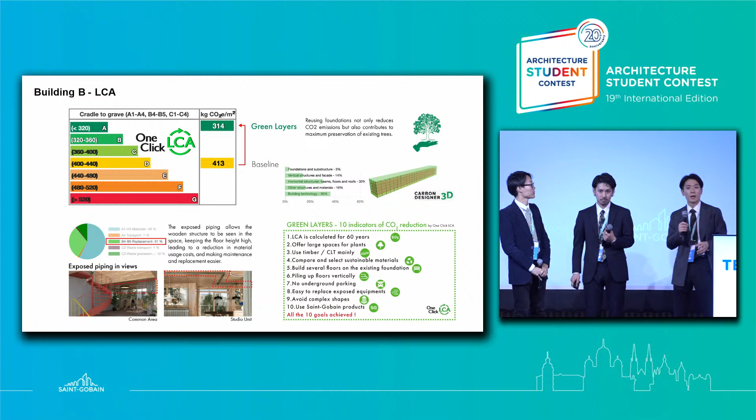LCA shows that the proposal can work effectively compared to the baseline, and moreover, we believe the high energy ratio of the future replacement in the red square can be improved by adding and exposing facility pipes on the ceiling of the CLT.

So this is a proposal for green layers, a future Viikki woven with greenery, which is friendly to both human beings and the environment. Thank you for your attention.

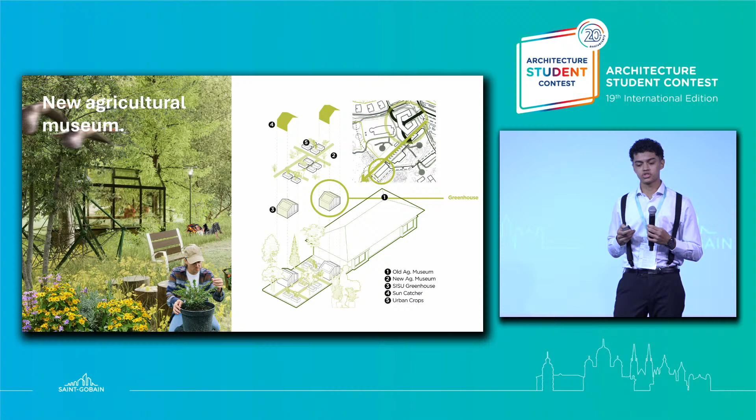As for our concept ethos, we decided to propose five key strategies under a compass model to help us establish a new standard or benchmark for sustainable and socially impactful design.

Then, we concluded that Sisu is sustainably vital. Sisu is heritage renewing. Sisu is community unifying. Sisu is skill enhancing. Sisu is resilient spirited.

This is Sisu. Then, we combined those five key strategies into our master plan called Connecting Sisu Through Urban Veins, in which going green was not an option, but a commitment.

This is why we used as many green strategies as possible, allowing us to reduce our energy consumption, treat our own water, and recycle about 1 million liters of water per year.

This is our response to having carefully considered bioclimatics from an early design stage, where multi-comfort was a must, because what is important for Saint-Gobain is also important for us, allowing each resident of the project to feel Sisu, hear Sisu, breathe Sisu.

To ensure that multi-comfort in our project was a reality, we decided to make use of Saint-Gobain top-tier materials, allowing us to have well-insulated, well-illuminated, and pleasant living homes.

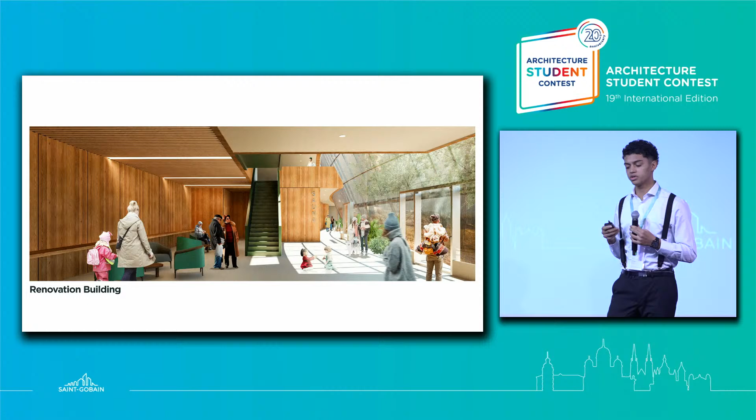We combined those 4 key strategies to design a new activity contained in a previous space. This allowed us to reduce the cost of new water or electricity lines while utilizing geothermal heating. This is how a good set of materials, along with a community-centered philosophy, can transform anything into a habitable space.

Regarding the LCA, our most proud achievement was being able to recycle about 128 windows and lots of concrete from buildings scheduled for demolition. This way, we could reduce our carbon footprint significantly while exceeding the minimum requirements for multi-comfort.

At the end, we concluded that it doesn't matter whether it's been 10, 50, or 80 years. We will always try to build a better future for the people. We will always try to make the world a better home. Kiitos paljon kaikille, thank you everyone.

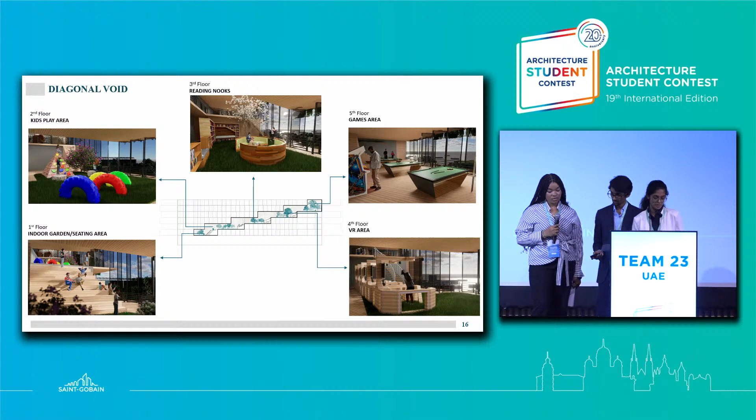Each floor has been carefully designed with a particular function catering to the needs of the people. From indoor gardens to play areas, reading nooks, and games, these act as an interaction point for the people. The ground floor has been activated towards the public.

On the rooftop, residents can enjoy a beautiful sky sauna, indoor pool, and lounge. Our housing typologies include studios, 2-bedroom, and 3-bedroom units.

In our project, we have utilized various Saint-Gobain products renowned for their innovation. Considering the nearby tramline, we have used Ecophon acoustic panels to reduce noise and create a better environment.

Gyproc gypsum plasterboards have been used in internal walls and partitions for their thermal insulation. Additionally, we have also involved Weber waterproofing and Isover insulation for their thermal resistance and water resistance.

Our building features 2 main services, such as the mechanical services and ducts, to do convenient waste disposal. Our main structure is made of CLT, reducing our carbon footprint, while our basement is made of reinforced concrete.

The sustainable construction of the CLT towards decarbonization aligns with the 2035 net zero plan for the future of Finland. We have used ventilation for our thermal comfort with energy-efficient windows.

For the visual comfort, we have considered natural lighting. For the green roof, plants help to reduce airborne viruses, while for the acoustics, we have taken insulation. We have achieved an A-grade system in LCA. Furthermore, to improve our energy efficiency, we have installed transparent solar panels, reducing energy consumption by 30%.

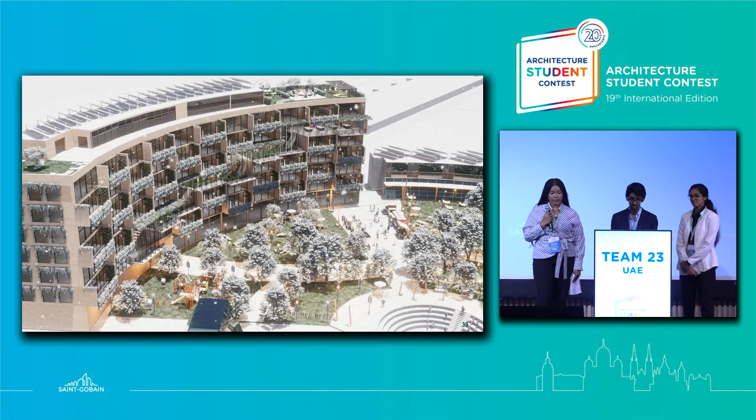Now, coming to Building A, our focus has been on making it community-friendly, energy-efficient, and versatile. We've kept the glass facade intact to preserve its original character and have minimal demolition inside the building. This ensures that the renovation respects the building's history while incorporating a sustainable feature to benefit both the environment and the people who use the space.

The ground floor caters to the researchers and the public with research labs and recreational areas. The housing typologies include studio and 1-bedroom units. We have embraced sustainability by creating geothermal heating, solar panels, and Saint-Gobain triple glazed windows.

Furthermore, we have also used circularity to improve our recycled materials. So we've used vertical glass louvers, using recycled glass. For outdoor pavements, we use concrete. For outdoor sauna benches, we use plywood cladding.

Now, the user journey depicts how each and every space has been designed for them, considering the love for communal engagement, integrating the indoor and outdoor spaces. In conclusion, the project Trellis considers the people and communal engagement. Thank you.

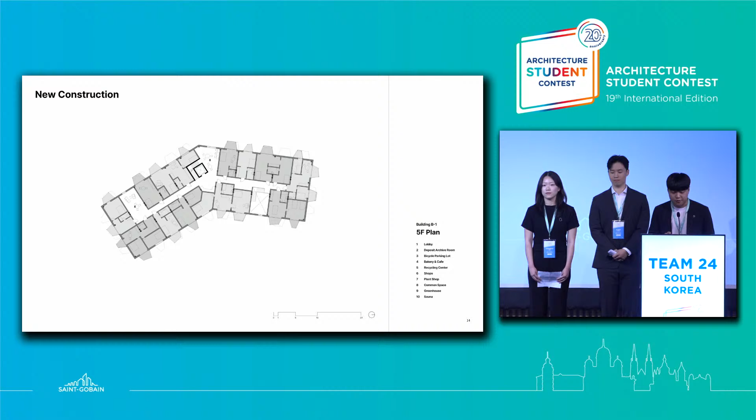At the same time, each housing unit will have barnacle spaces where people can enjoy personalized activities with light and nature. Meanwhile, there are common spaces throughout the building. The double-height community space between the housing units creates a sense of openness and brightens the inside, and the basement community spaces are lit by the barnacle skylights.

For the renovation, as we previously mentioned, the connection between people and nature is important. So we created a passage through the existing building to overcome the height barrier and disconnection between the two sides of the campus. Additionally, we replaced the existing glass facade and added new space, including a public area on the 1st floor and a residential area starting on the 2nd floor.

The greenhouse is heated by waste heat from the basement's data room, reducing energy consumption and improving indoor air quality. The extra heat will be used in special activity spaces on the roof. The existing level difference is not a barrier anymore, but shapes an interactive space between people and nature.

In the housing units, the same strategy with barnacles was applied, maximizing views to the outside garden. And the exposed original wall of the remaining part reveals each historical layer.

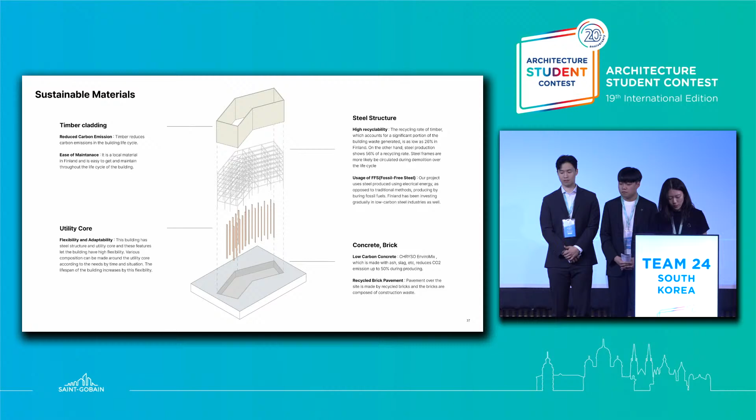For the materials we use, low carbon concrete reduces emissions up to 50% in production, and fossil-free steel shows a 56% recycling rate in Finland. Construction waste from the original building was reused as pavement on the site.

Thank you for the attention.

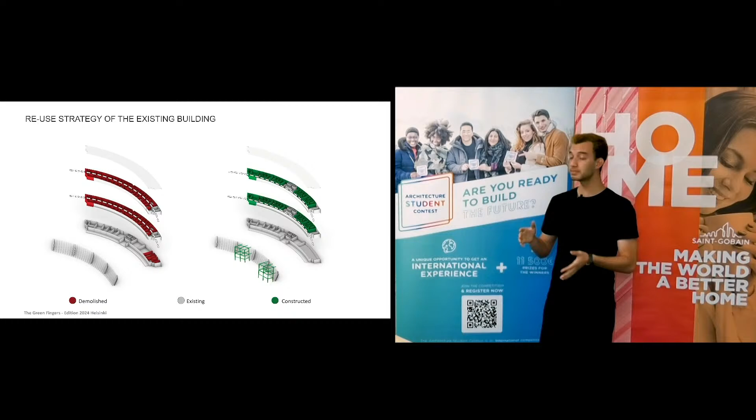We treated both masses as one building, keeping the ground floor for general use and semi-public spaces, and the other floors for residential space. When we started renovating the old building, we kept the exterior as it is, and then changed the interior spaces to accommodate the new use for this building.

We've also added a co-working space with urban steps to connect our project with the existing gardenia and other parts of the project as well. We've added triple bedroom units on the main residential finger and single and double bedroom units in the secondary residential finger, along with an underground garage beneath the main residential finger.

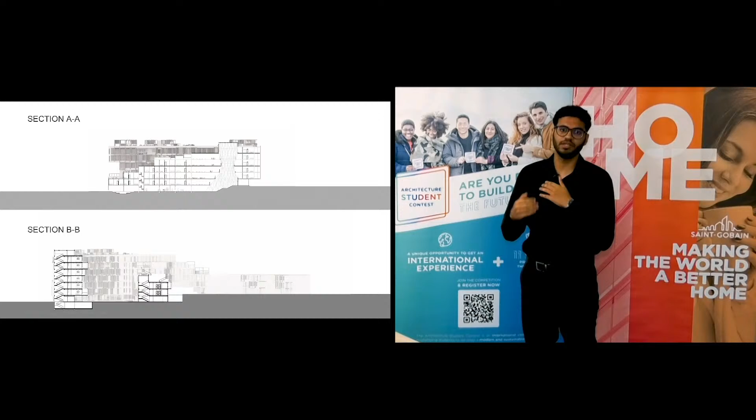For the green vertical spine, we've used operable windows. In cold winter conditions, the windows close alongside the greenery to create a greenhouse effect, heating the entire building. In summer, the windows open to create cross ventilation, cooling the building and enhancing thermal comfort and air quality throughout.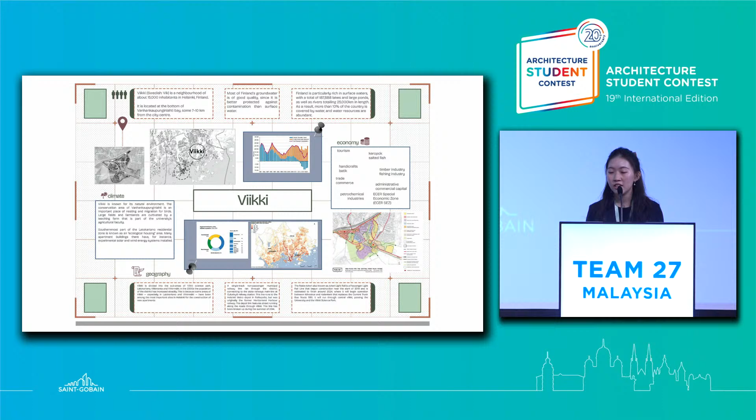The world is changing, but is our architecture changing with the world? Viikki is home to the natural science faculties of the University of Helsinki, where nature is of great importance. The Viikki Nature Reserve is a bird sanctuary filled with floodplain forests, outdoor marsh, and coastal meadows, inspiring the concept of living education and educational living to create a scheme entitled Viikki, the Edu-Buoyancity.

A pilot study on the climate and geography of Finland revealed a phenomenon of flooding caused by coastal winds and rains, rapid melting of snow, and overflowing rivers. Even though the situation in Helsinki is not as bad as other regions, climate reports claim it is bound to worsen.

Therefore, the concept of urban buoyancy is introduced, whereby buoyancy principles are applied to achieve balance, equilibrium, and a bounce-back mechanism to constitute a social hydrology educational hub for Finland.

Urban buoyancy-inspired architecture emphasizes eco-friendly infrastructure, including stormwater management systems and sustainable construction methods, allowing buildings to float or rise with changing water levels.

Urban buoyancy is also incorporated into the edges of the site through urban buoyant streetscapes, combining Lammassaari, Vanhankaupunginlahti Bay, and the mouth of the River Vantaa as ecologically thriving water bodies.

In redesigning, supported by several precedents proven to be flood-proof, the Buoyant City is powered by buoyant foundations, with innovative solutions addressing issues of engineering and sustainability.

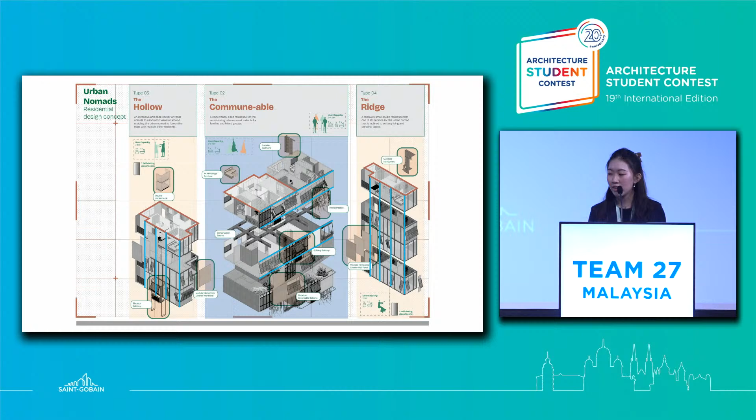The residential units are designed as multi-purpose communal chambers bridged together by a facade system of mobile balconies. Each student chooses how much space to occupy, to expose and enclose, as well as the facade systems in terms of light and ventilation, privacy, and accessibility to the outdoors.

Via two types of mobile balconies: one provides an external track to which the balcony functions as a vertical elevator or horizontal vehicle, while the other is an inbuilt tray that fans out radially into the external facade. Studies on materiality, U-value impacts, and daylighting are also made to ensure maximum living comfort within the residential units.

The new master plan seamlessly connects with the existing student residence functions, allowing students to engage in boating activities and crisis planning, participate in water management systems and agriculture, and harvest fish and prawns through aquaponics, which are harvested and processed into traditional dried fish sold at the community market.

The existing wall structures for the faculty are retained, with newly built bathrooms, toilets, and facade systems for the new student residents. Evidently, the aim is adaptive reuse, while still linking back to the pre-existing building programs and community.

Using the SG Save Eye plugin, energy calculations are made, and the data is used to perform a comprehensive life cycle assessment. Based on the priority and needs of each space, Saint-Gobain's various construction products are inputted into each corner of the project, with sustainability objectives to build better, create healthier spaces, achieve net zero acoustics, and produce sustainable insulation that come together to improve the built environment, eventually creating a better living space for all members of the ecosystem, and finally achieve the goal of making the world a better home.

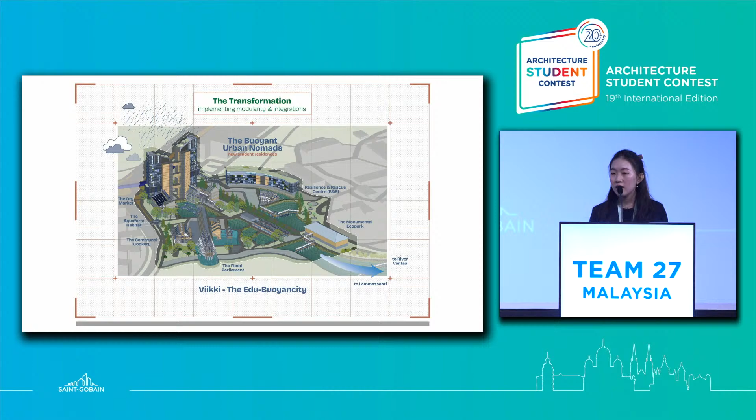By implementing modularity into both the old and new student residences, and by injecting new life into the concept of the master plan via the Buoyant City, the Viikki campus is transformed into the Buoyant City, a model of resilience for Viikki and Finland.

Ultimately, the nomads of the Viikki community find their own habitat in an architecture promoting manifold movement around people, nature, and the city, upon buoyant foundations and vessels that float over the man-made lake, circulating water, resources, and other beings throughout all seasons of the year - seasons of bloom and harvest, and seasons of crisis and recovery.

In Viikki, the all-new...

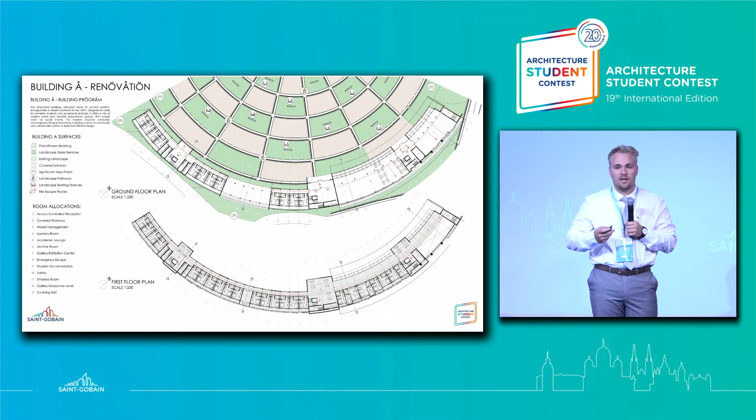Having a look at the floor plan, we started having a look at bringing in academic spaces as well as living spaces to maximize the social and economical aspects of the building itself.

We started having a look at the structure of the building, keeping the height of the building consistent, as we know that in winter the sun azimuth can be quite low, so we can allow enough daylight to reach the courtyard itself. So we started to omit a slab on the inside to allow light to filter through, as we look at the new exhibition space that has been provided - this can also be used to filter light throughout the building into the courtyard.

Having a look at the dynamic facade we've decided to incorporate, the louvre timber facade, that will allow people to tackle the difference between day and night, so that we can give back to the people. As this structure is managed manually, it can give ownership to the occupant as well. This is the dynamic facade in use - an ever-changing facade, giving more dynamic ability to the facade itself.

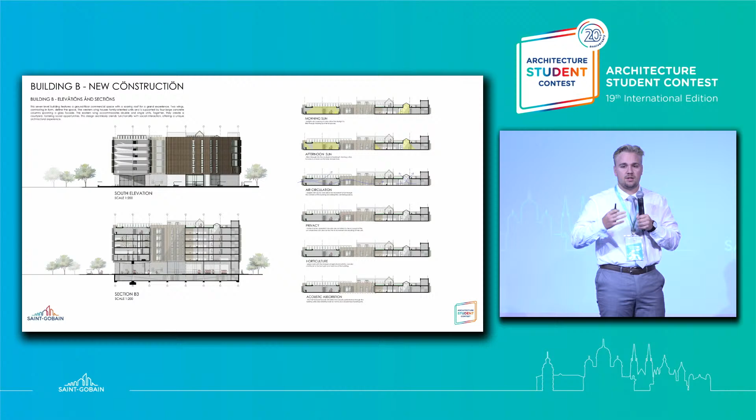The strategies incorporated, along with the architecture of the louvre facade, start forming uniformity throughout the building, bringing back to the architecture through these different structures. Thank you.

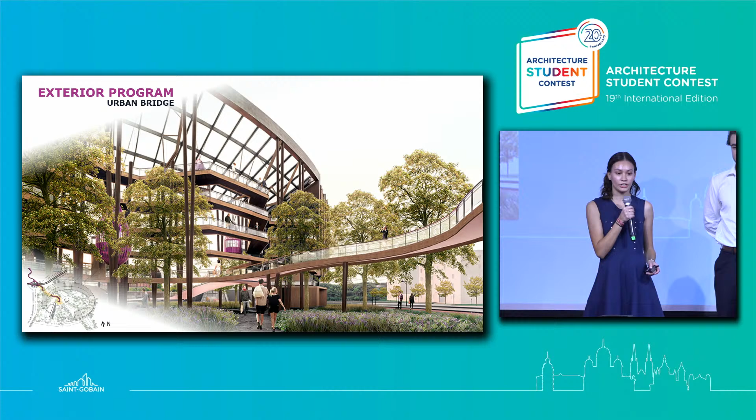The exterior area aims to unite residents with nature. An urban connection is reinforced through a bridge crossing from the roundabout towards the gardenia. The multi-purpose nests serve as a shelter, alluding to the bird reservation area, as well as a sculptural wall around the old museum. The central sauna is a reunion spot, connected to a swimming pond for cold baths and temperature changes. Moreover, everything is linked through paths, a bike lane, and a cross-country ski route, leading to each activity.

The project adapts to the natural topography of the site, locating commercial areas and public spaces on the ground floor and first level. From the second floor to the fifth floor, there are apartments and hanging nest cabins, offering shared leisure and studying spaces able to connect with nature. Additionally, there is an underground parking lot and a rooftop garden.

The facade exhibits a pattern of 3 types of apartments: studio, double, and triple. Each apartment has flexibility to be modified, since all interior walls are adjustable, allowing for adaptability in each unit, extending the lifespan of the entire building. The structural system is built by CLT panels following the existing building structural model. The facade consists of recycled triple low-E glazing and dark tone wood cladding.

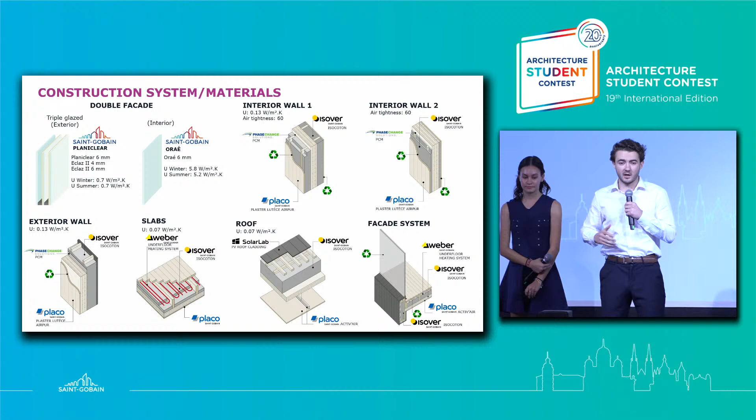Both CLT slabs and walls contain a thermoacoustic insulation called Isocoton, made of recycled clothes, as well as a layer of phase-change materials used to stabilize indoor temperatures. Finally, a large amount of energy is produced through the solar-paneled roof.

Building A remains for retrofitting. Additionally, both buildings' elements such as doors, windows, sanitary fixtures, and claddings are relocated. Also, through Saint-Gobain's recycling system, glass and gypsum board are recovered.

Finally, demolition waste is used for exterior furniture and pavement. Based on an energy modeling analysis, Luonnonkoti is a net zero project. Due to bioclimatic design strategies and photovoltaic panels, the building produces more energy than it consumes, offsetting the embodied carbon footprint through its life cycle. Therefore, the project is designed for the future: flexible, replaceable, repairable, dismantleable, and easily maintained.

Luonnonkoti represents the power of proposing. It is not just any project, but a place that adapts to Finland's climatic conditions, integrates with nature, and contributes to Viikki and its people through innovative and sustainable technologies aiming to mitigate climate change. Let's reciprocate nature's embrace with our own.

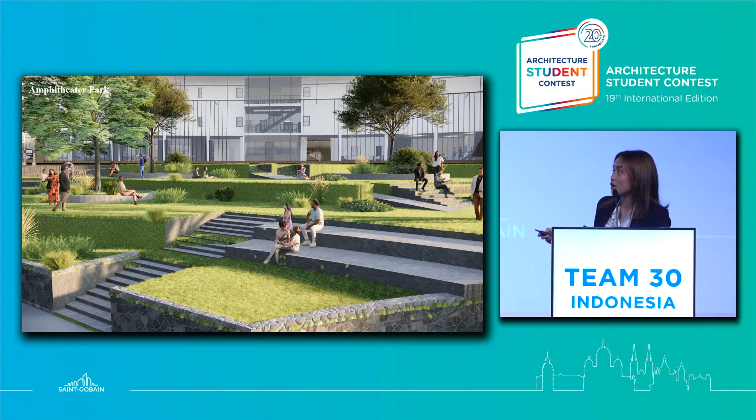This is our master plan. We use native vegetation that is often used in research for the researchers and the students in their studies. We also added an amphitheater park for visual access for building A surrounding the area. This is our museum. We added a bird watching program connecting the existing arboretum to the museum. This purpose is to revive the museum as shown, with natural surroundings and cultural heritage buildings.

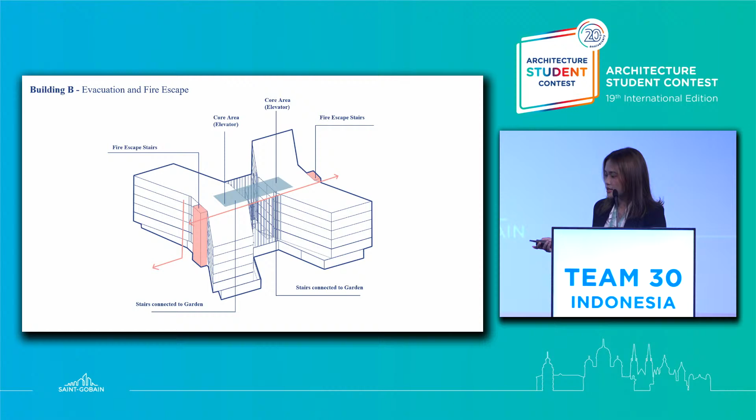This is our perspectives. And we have a rooftop garden for communal use for building B. In emergency, we have fire escape stairs with core areas, and the fire escape stairs use fire-resistant materials for the building.